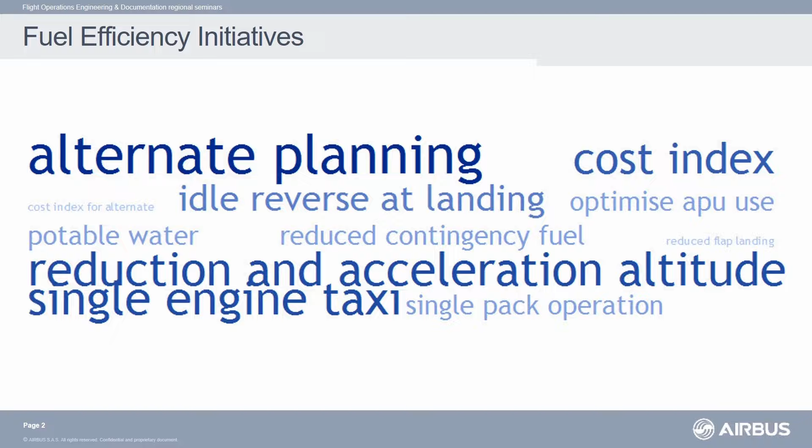Decreasing the thrust reduction and acceleration altitude is one fuel efficiency initiative as well. Decreasing the acceleration altitude reduces drag and is therefore good for fuel. Thrust reduction, on the other hand, has low impact on fuel, but we usually decrease thrust reduction as well so that the thrust reduction altitude equals the acceleration altitude. So in the end, we reduce both the thrust reduction and acceleration altitudes.

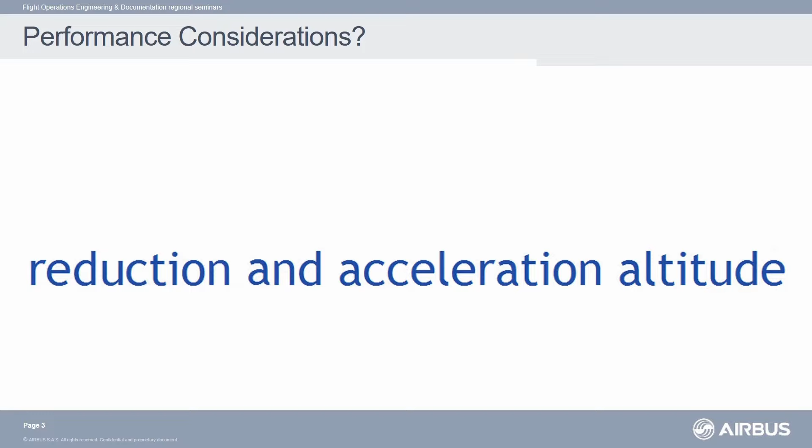But have you thought about the impact on performance? This presentation aims at discussing the impact of an engine failure above the thrust reduction altitude on obstacle clearance. We will first look at how the engine out acceleration altitude, thrust reduction and acceleration altitudes are defined. Then we will look at the performance impact to finally work out a solution together. This presentation is really about making airlines aware of the performance impact of reducing the thrust reduction and acceleration altitudes, and highlighting existing solutions.

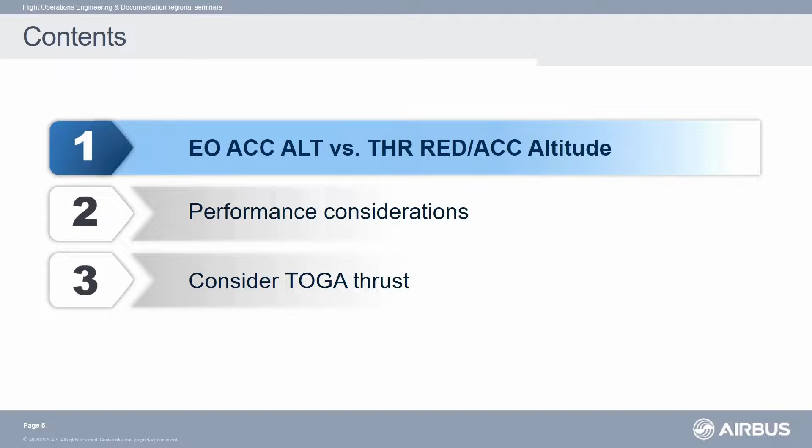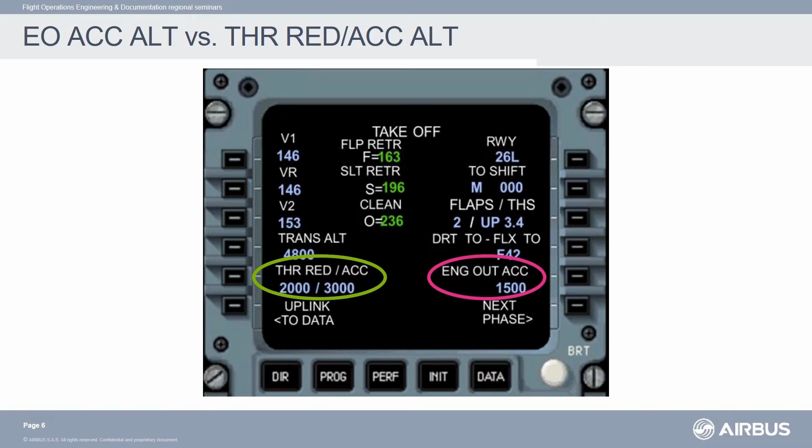Let's start with the definition of engine out acceleration altitude, thrust reduction and acceleration altitudes. During cockpit preparation, pilots enter in the FMS both engine out acceleration altitude, all engine thrust reduction altitude, and all engine acceleration altitudes. Let's have a look at the constraints that impact the selection of those altitudes.

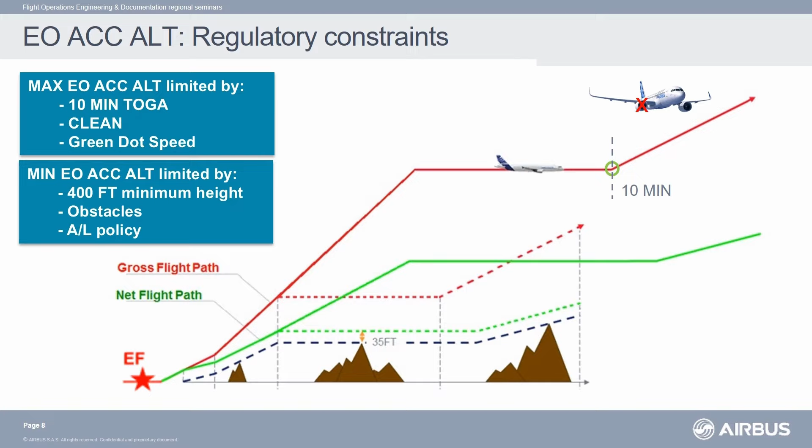The engine out acceleration altitude is determined by regulatory constraints, certification and operational regulation. It assumes a takeoff flight path with engine failure 1 second before V1. The minimum engine out acceleration altitude is limited by the regulatory value of 400 feet, obstacles, or airline policy. The maximum engine out acceleration altitude is limited by the 10-minute use of TOGA. The aircraft must be in clean configuration and at green dot speed within 10 minutes.

The engine out acceleration altitude can be determined using a takeoff chart or a takeoff performance application. On the chart, the flight crew can find the minimum and maximum QNH altitude, taking into account the regulatory constraints. With the takeoff performance applications, the flight crew directly gets the engine out acceleration altitude, taking into account the airline policy.

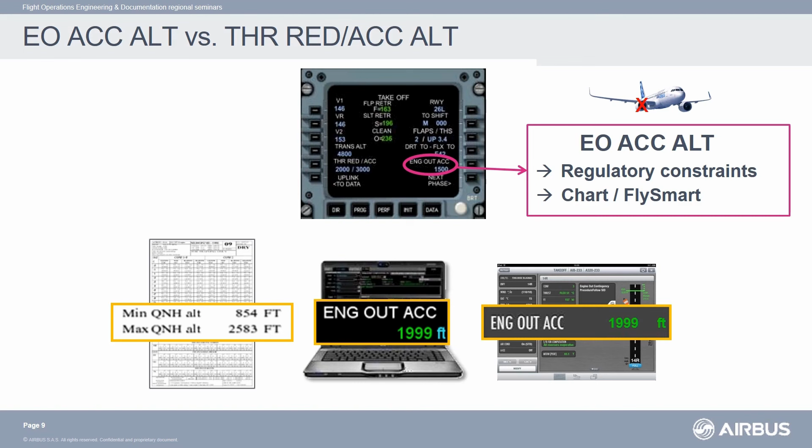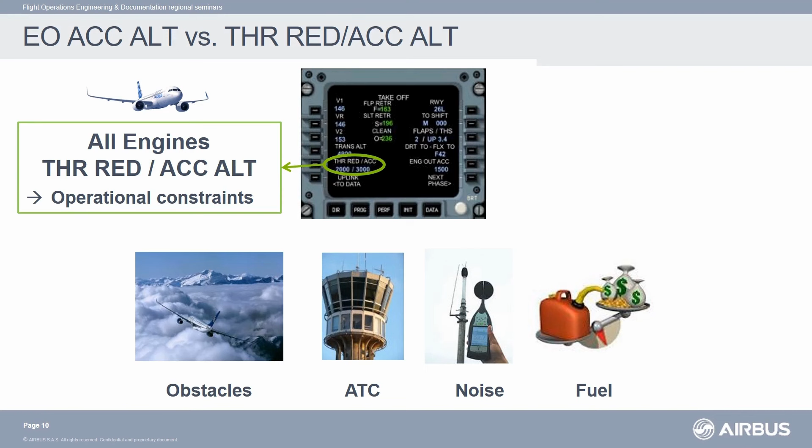The thrust reduction altitude and acceleration altitude are all engines parameters. They are determined taking into account operational considerations and are not strictly defined in the regulation. The operational considerations taken into account to determine the all-engine thrust reduction and acceleration altitude can be SID constraints, obstacle or ATC, noise, like NADP procedures, or fuel efficiency considerations. The constraints are totally independent - there is no link between the engine out acceleration altitude and the all-engine thrust reduction and acceleration altitudes.

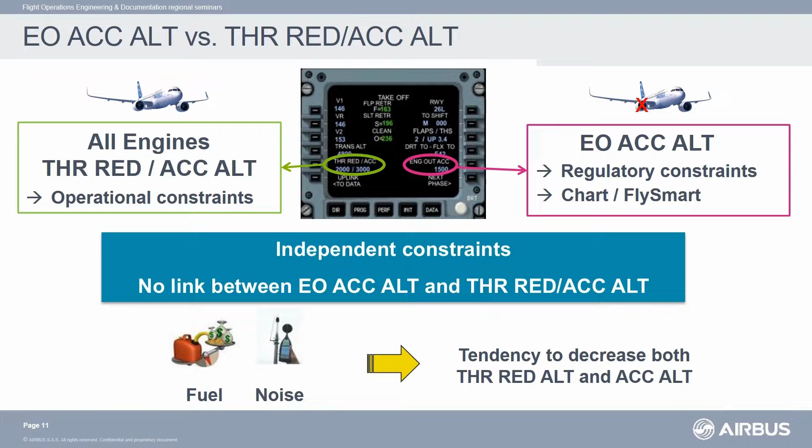Today, due to fuel efficiency and noise constraints, operators tend to decrease more and more both all-engine thrust reduction altitude and acceleration altitude. But this surely has an impact on performance. Let's look at it together.

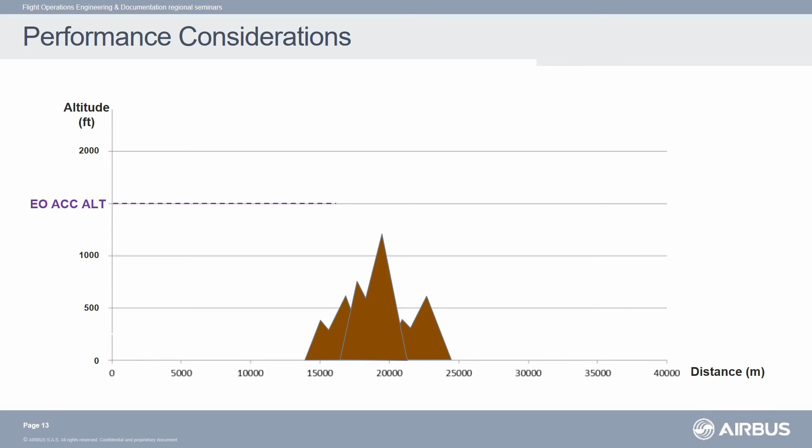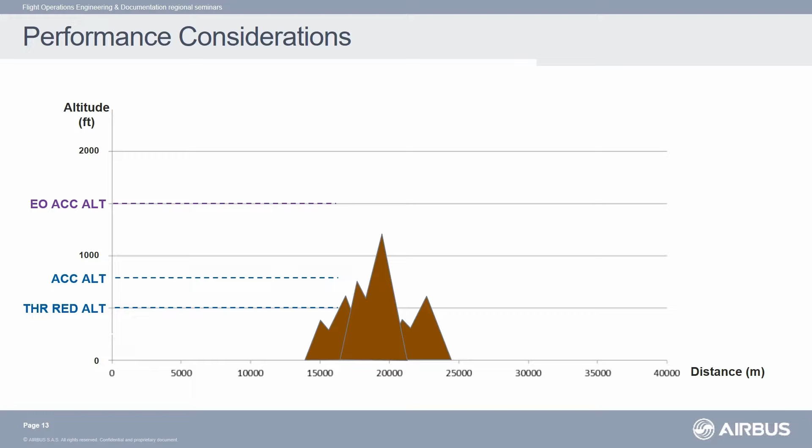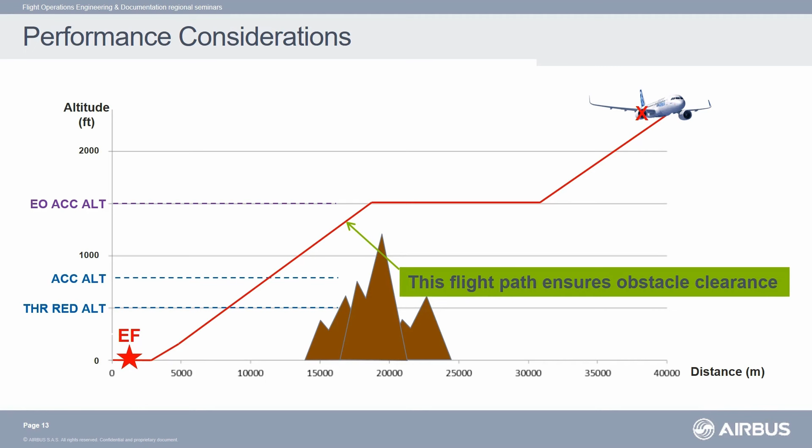Let's consider a takeoff flight path. In this example, the engine out acceleration altitude is 1,500 feet. The all-engine acceleration altitude is 800 feet, and the all-engine thrust reduction altitude is 500 feet - here we have the thrust reduction altitude, which is below the engine out acceleration altitude. In red, we have the takeoff flight path considering an engine failure at V1. This flight path fulfills all regulatory constraints and particularly ensures that the net flight path clears obstacles with a 35-feet margin. In green is the flight path with all engine operative, taking into account a thrust reduction at 500 feet and an acceleration at 800 feet.

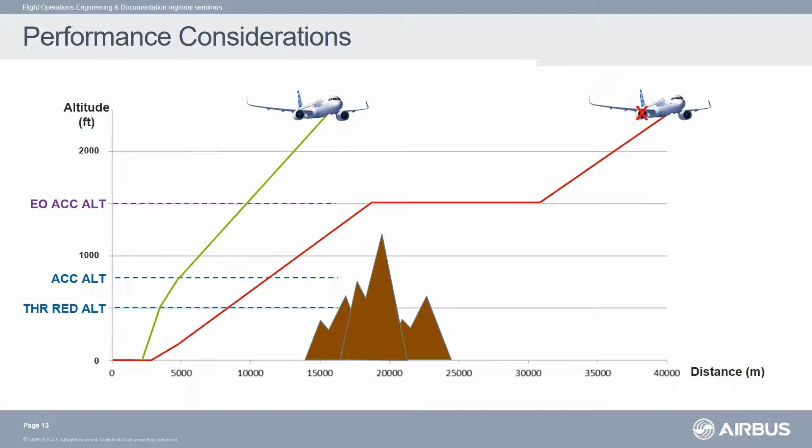Thrust reduction and acceleration altitudes have been determined in order to comply with all engine constraints. The flight path with all engine operative always remains above the flight path computed with engine failure at V1. But what happens if an engine failure occurs after the thrust reduction altitude? The flight crew is in climb.

The most critical case in terms of performance is engine failure just after reduction. This is a scenario to check. In that case, lever MCT flashes on the PFD.

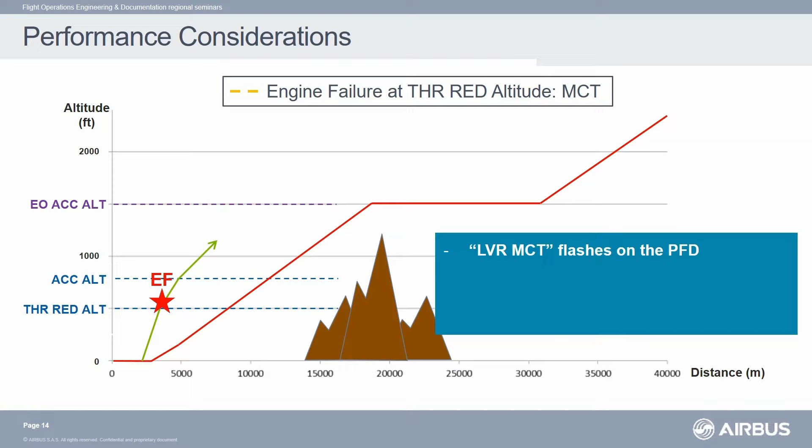When the pilot sets the thrust lever to max continuous thrust, the aircraft climbs at constant speed, V2 plus 10, up to the engine out acceleration altitude, where the pilots initiate level off and accelerate to green dot speed. The flight path becomes the yellow one.

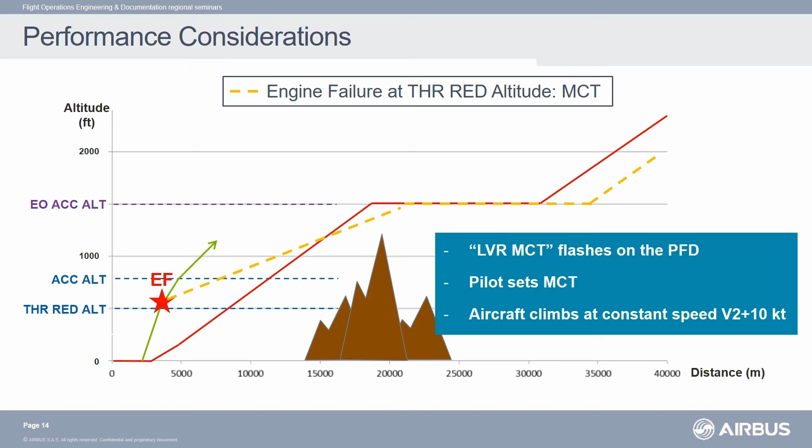With such yellow flight path, the obstacle clearance might not be ensured anymore in those two areas with max continuous thrust. Such issue only happens if the thrust reduction altitude is below the engine out acceleration altitude.

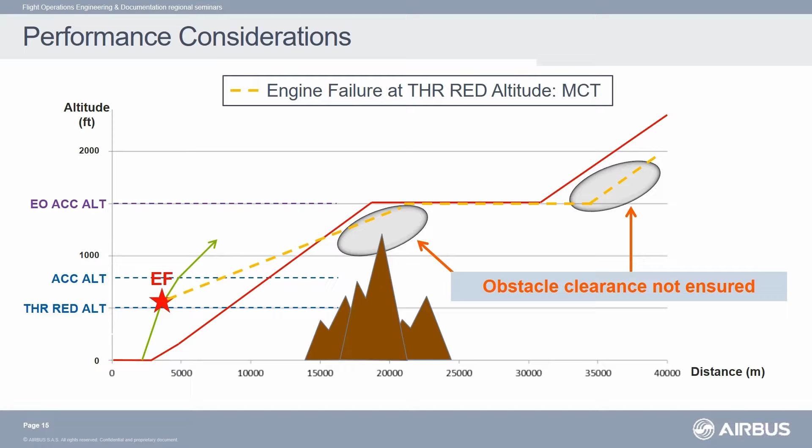Let's consider a second example, the case of an engine failure at the acceleration altitude. Again, lever MCT flashes on the PFD. When the pilot sets the thrust lever to MCT, the climb mode remains engaged.

The aircraft will simultaneously climb and accelerate to green dot speed. As the aircraft tries to climb and accelerate at the same time, the resulting climb gradient is low. The aircraft climbs up to the engine out acceleration altitude, where the pilot initiates the level off and continues acceleration to green dot speed. The flight path is the yellow one.

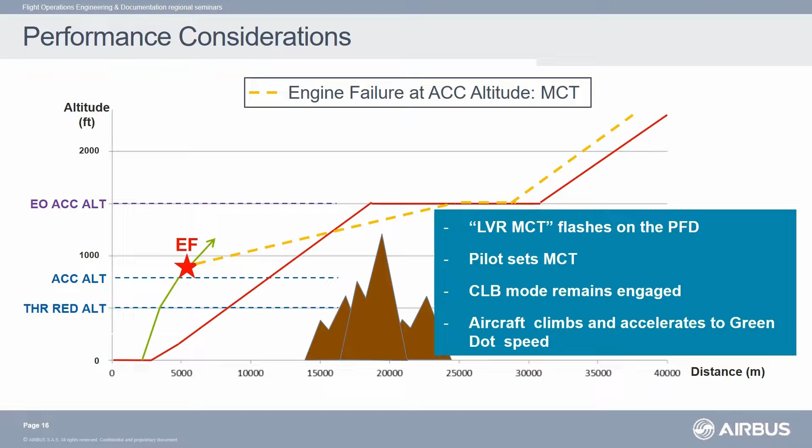Again, with such yellow flight path, the obstacle clearance is not ensured anymore in this area with max continuous thrust. If no obstacle, this is not a problem. But what if there are obstacles?

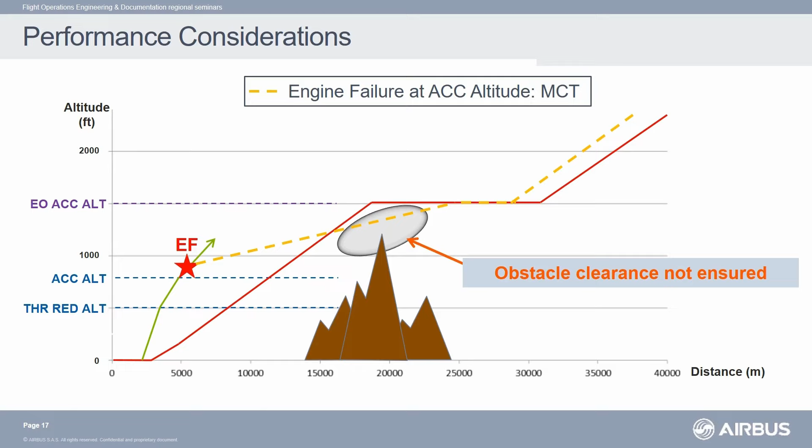This is not a new problem, but it is true that we more and more reduce the thrust reduction and acceleration altitudes. So finally, it is more of a constraint today than it was before.

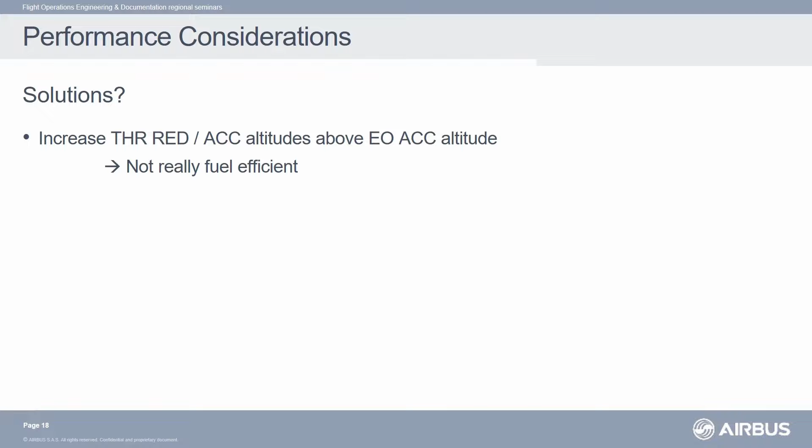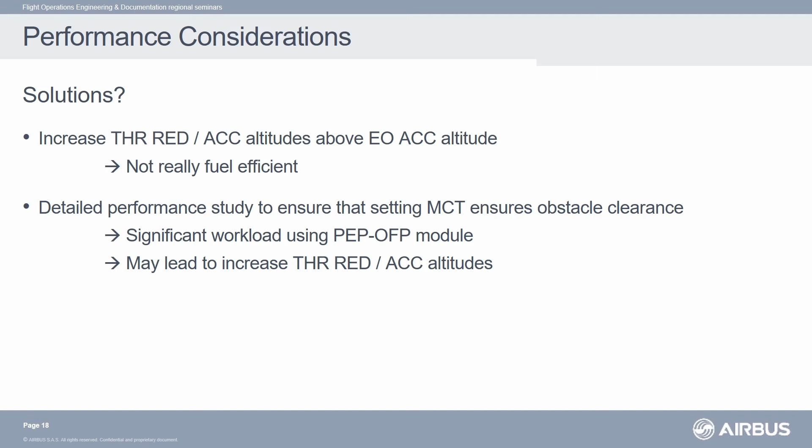What could be the solutions? Increase the thrust reduction and acceleration altitude above the engine out acceleration altitude, but it is not efficient in terms of fuel. A detailed performance study can be done to ensure that setting max continuous thrust ensures the obstacle clearance, but this requires significant workload and the result may lead to increase the thrust reduction and acceleration altitudes as well.

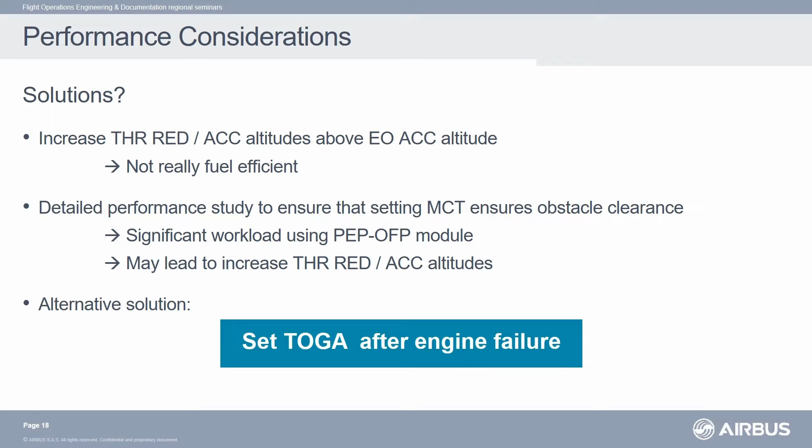In fact, there exists an alternative solution, to set TOGA thrust after the engine failure. In terms of aircraft performance, the solution is easy. Putting TOGA back always works, without additional detailed study.

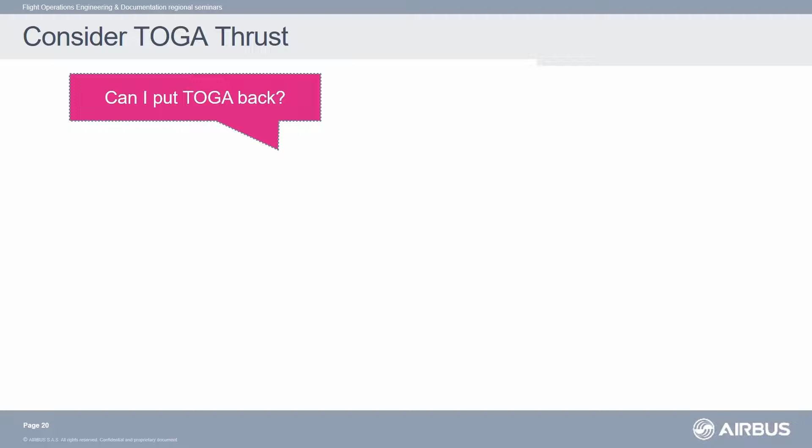But can I put TOGA back? The answer to that question is yes, TOGA always remains available. The FCOM says, if necessary, move the thrust lever of the active engine to the TOGA detent. From a system's point of view, it is possible to set TOGA back.

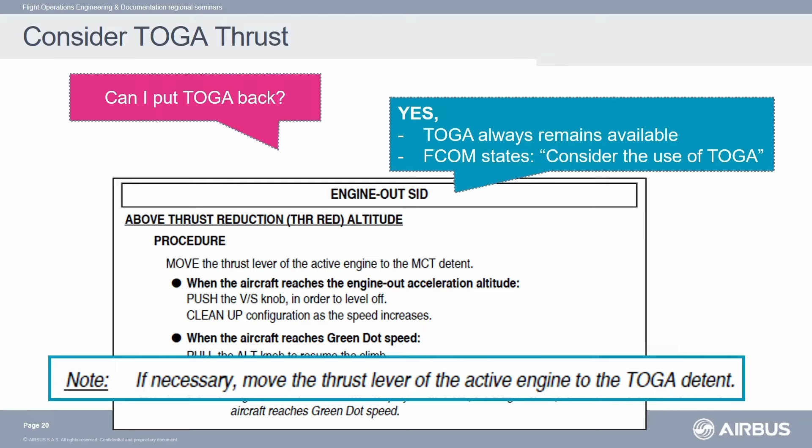Let's have a look at what happened on the takeoff flight path. In the case of an engine failure at the thrust reduction altitude, lever MCT flashes on the PFD, but the pilot can disregard it and set TOGA.

In that case, the SRS takeoff mode remains engaged and the aircraft will climb at constant speed V2 plus 10. As the thrust available is higher than MCT, the climb gradient is higher. The aircraft climbs with this speed up to the engine out acceleration altitude, at which the pilot initiates the level off and starts acceleration to green dot speed.

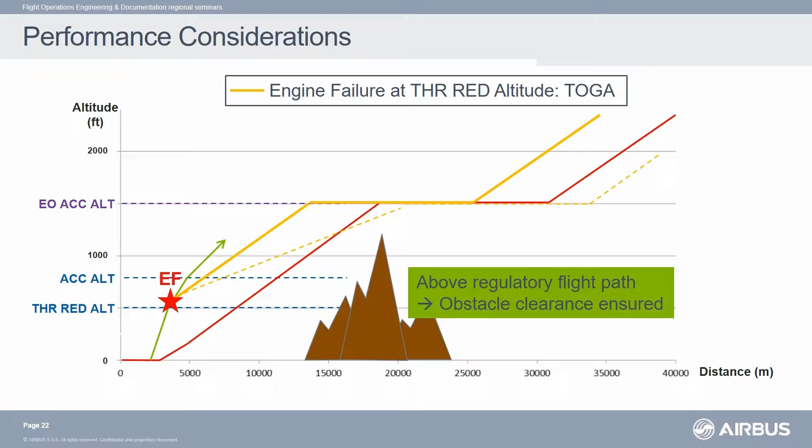Let's now come back to the case of an engine failure at the acceleration altitude. Lever MCT flashes on the PFD, but the pilot can disregard it and set TOGA. In that case, the SRS go-around mode engages and the aircraft will climb at constant speed.

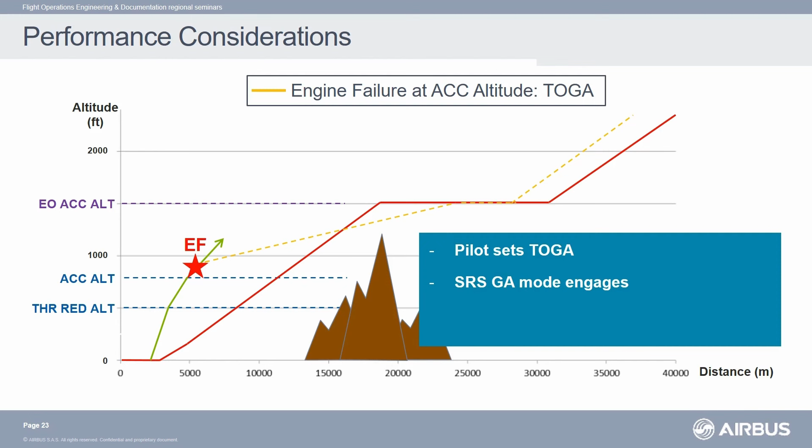This speed is equal to the maximum of VAPP and current speed limited to VLS plus 15. The aircraft climbs with this speed up to the engine out acceleration altitude, at which the pilot initiates the level off and starts acceleration to green dot speed.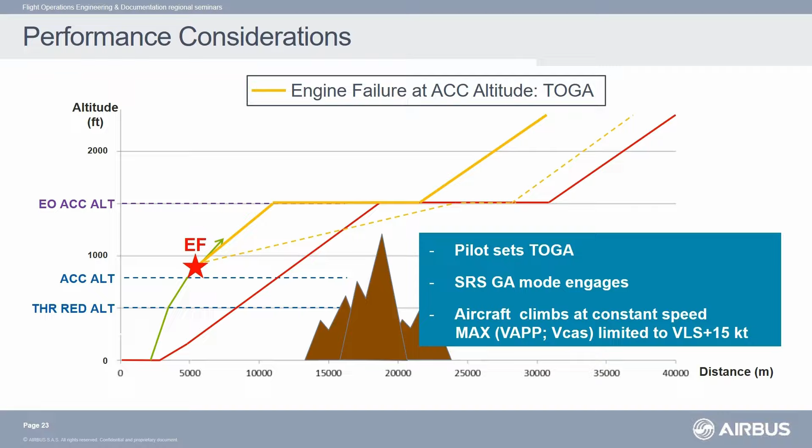This flight path with TOGA thrust always remains above the flight path considering an engine failure at V1. The problem of obstacle clearance is solved in that case as well. Using TOGA, obstacle clearance is always ensured by the engine failure at V1 case.

I need to highlight at this point that we have such issue with obstacles, but this question is not specific to engine out SID. Even if the procedure in case of engine failure at takeoff is to follow the SID, it can be a constraint.

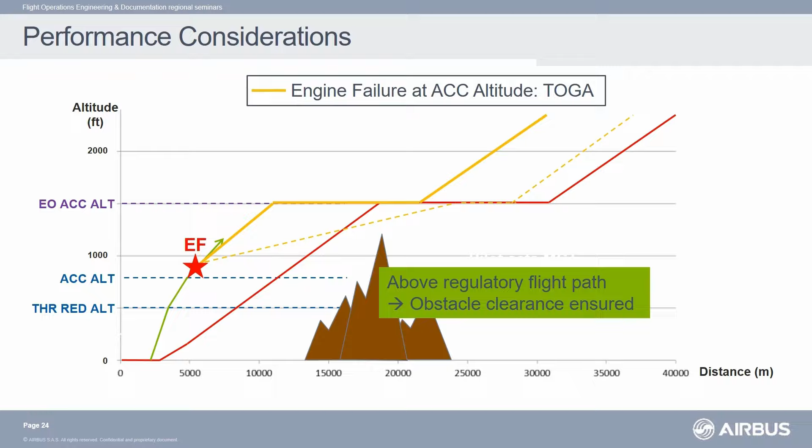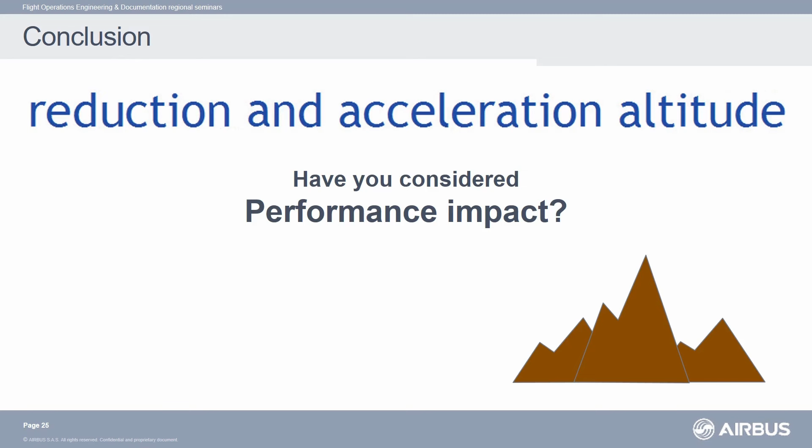Remember what we said in the introduction. This presentation aimed at making you aware of the performance impact of reducing the thrust reduction and acceleration altitude. Engine failure after the thrust reduction altitude is not covered by regulatory calculations.

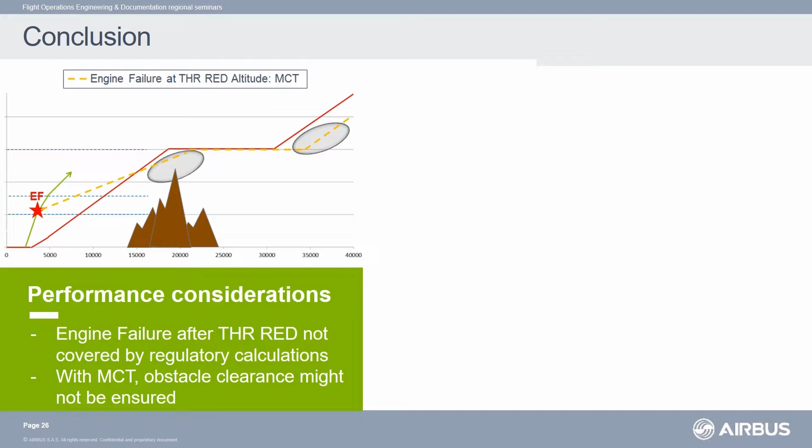With max continuous thrust, obstacle clearance might not be ensured if the thrust reduction altitude is below the engine out acceleration altitude. But TOGA remains available.

This is not a new subject, but it is true that it is becoming more of a constraint with the implementation of green operating procedures. Putting TOGA back enables taking benefit of the fuel efficiency procedures without any additional study.

We therefore decided to clarify the Airbus documentation in order to incorporate a clear statement to highlight that the use of TOGA thrust can be a solution in case of obstacle constraints. Thank you.